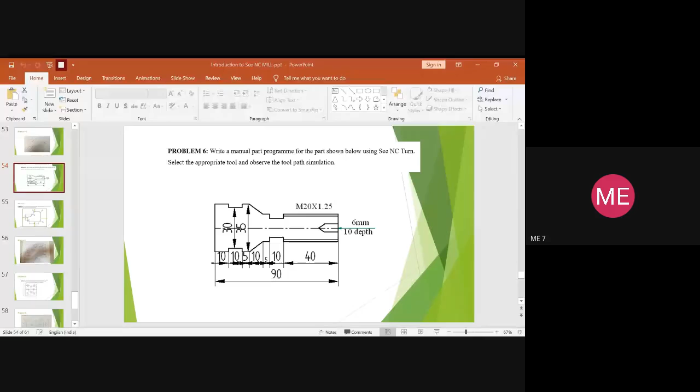Hello, yes ma'am. Okay, so this is program number six, what we will be doing on our CapsTurn. We have already written the program for this blank, right? Manual part programming, and we have dealt with the coordinate systems also, right?

The same coordinates for turning—it is always very easy, as we have only two axes: one is the Z axis, another is the X axis. If you go towards your left, it is negative; if you go towards your right, it is positive. Above this reference line it is positive X, and below it is negative X, so that you are aware and know how to take the coordinates.

So here, when you look at the given part, you have to do a regular turning operation, and also a thread cutting operation. Apart from that, we have grooving—both axial grooving as well as radial grooving. So all these operations now have to be done in our CapsTurn.

So for that, what is the first step? The step is as usual what we followed in the other CapsTurn operations—we will be providing the coordinates only for half of the part which has to be developed. Once the coordinates have been given, the line diagram will come for this part.

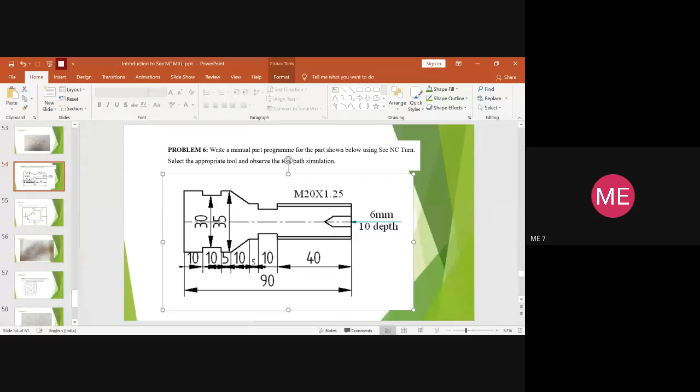So this is the same part we need to create now using CapsTurn. Let us kindly take down a snapshot of this diagram. It is needed for you to let me know the coordinates, and after that I will start up with the software part. Have you people taken down the drawing? Yeah, at least the snapshot of it. Yes, ma'am. Okay, if that is so, I will just end the presentation and go for the software directly.

Is my screen visible?

Yes, ma'am. Okay, so as usual you go for CapsTurn, double click, the window opens, right? For the startup, it asks you to create a new part. So when you open it, this is the work setup which you get. I have explained the work setup sheet in the previous program also.

You need to select the material which is free to perform the operation. So you go for the material steel, which is for free cutting. So you will select steel here, which is for free cutting. Select that, right? So holding is always external.

Don't make any changes. The jaw position you should give - I have explained why it is 110 in the previous session. So you'll be having the job, and you have to see the dimension of the job. In between, at least we need to give 5 or 10 mm clearance, and the jaw holds it, right?

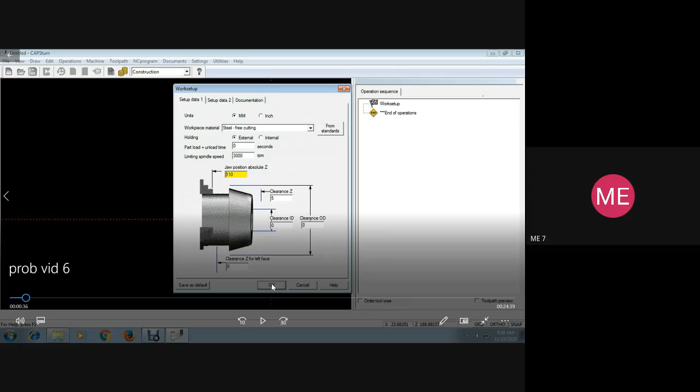Apart from that, you have to give the dimensions such that the jaw will hold. For the jaw to hold the blank at one end, at least 20 or 30 mm has to be given. So this entire length will hold good for 110. If you write positive 110, it will come the other way. So kindly type it as minus 110 so that it takes the dimension towards your left hand side. Kindly provide the jaw position accordingly.

Okay, so for the clearance value Z, it is always preferable to give 1 mm so that before starting, the tool will be somewhere nearer to the blank and will not be touching it. So give a positive value - it is not needed more than 1 mm. Just give the clearance value as 1 mm, and after that you can press OK.

The clearance outer diameter - you just check the diagram and give the outer diameter. After that, you will go for drawing the line using the line command, right? So as I explained in the problem, you will be just providing the coordinates for the upper part. The lower part will be displayed automatically when you go for the machining process, because only the coordinates for half is needed - the other half, since it is a turning operation, will be taken automatically.

But in case of writing the part program manually, we used to give the entire diameter of the blank. But while doing the reverse - drawing the part and generating the code - you will be just giving half the coordinates. So that is the case where you will start up with the coordinate system now. Usually you start up with x0 and z0.

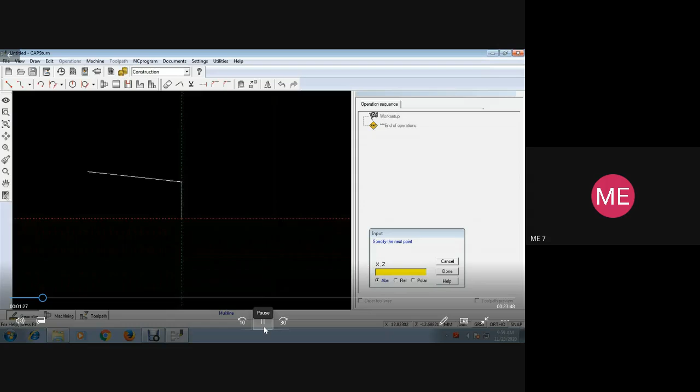Kindly check the diagram of the PPT. Yes ma'am, right, so I don't have the reference. I have closed my PPT over here, so kindly cross check.

So x will be 10 here and z will be 0, so the line has come over here, and then it has to move towards your left. So x remains same, z is going in negative direction for 40 mm, and hence now x is 10 and z is minus 40, so you have got this line over here.

So then I guess you have a groove cutting option at this point. So you have an axial groove cutting operation. Please look in the diagram. So for that you have to go for grooving. So if you see here the image what I'm showing, this is for grooving.

So you have to click this. It asks you which is the width you need and what is the depth of grooving which has to take place. So it is an axial groove cutting, so you have to provide the width accordingly. So what is the width you need for the groove?

If you look into the sketch, I guess 10, is it 10 ma'am? 10. So you will give the base width as 10 and the required depth as 3. So you can see the slot for the groove.

So now where you will fit, you have to again give the coordinate here, x 10 and z minus 40. So then it will come and sit over here directly. After that, you need to proceed further.

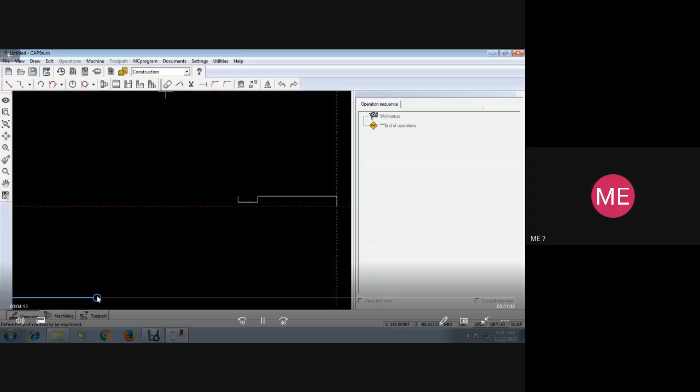So just provide the coordinate from here till here, and the linear interpolation coordinate. You have to check and let me know the coordinates, or else it will be difficult for me here. I haven't taken the image also.

So after this linear interpolation, again you have one more groove. What you have to do, let me take a snapshot of it.

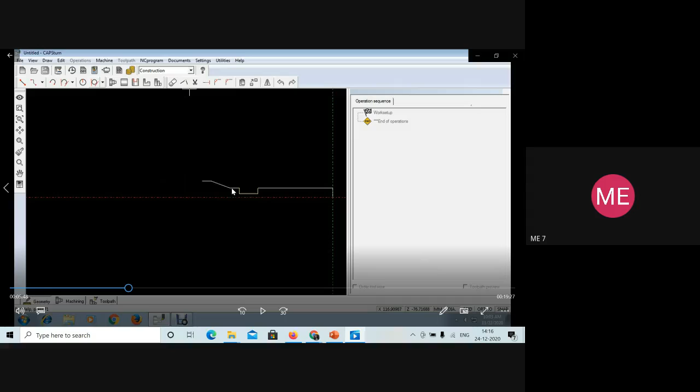So after this, you had a varied length for tapering. So here again, now the x has been increased. Overall diameter of the blank is 35, means it is 17.5. So here x will be 17.5 and z will be 55 plus 10, so it is minus 65.

So after this, you had again a linear interpolation for 5 mm. So here x will be again plus 17.5, and z will be 40, 55, 65. So z will remain 65 at this point.

So after this, we have the groove cutting operation again. So we need to start with the groove cutting operation, so you have to go for groove cutting. And now again, you have to provide the width.

Width is again 10 mm, right? So you will have to provide the coordinate. Again, x is equal to 17.5 and z is minus 65.

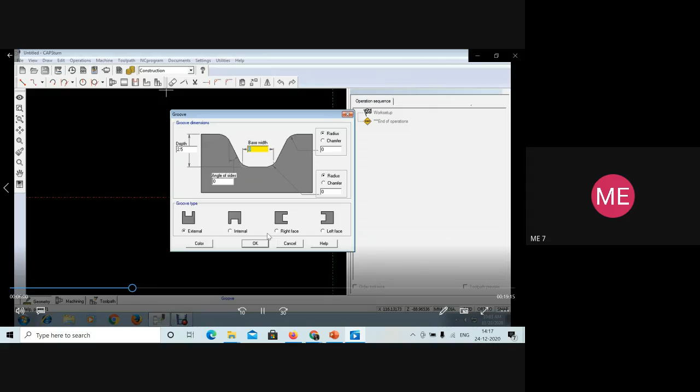65 plus 5, I guess, 65 plus 10. What was the coordinate? I didn't see. It's always better to write and keep the coordinate. It is minus 75. It is minus 70, okay, I missed 5 somewhere.

So after this, you have to again start the coordinate system, right? So go for the line command. From here you have to give, so x is 17.5 and z is minus 80.

Okay, so from there you have 10 mm, so again x will remain 17.5 and z was minus 80. You will add minus 10 again, it will be minus 90.

So now we are done with half the part. Once you have created the line, always remember you have to go for draw and define the contour, and define the part. The color gets changed. Without defining the contour and defining the part, you cannot perform any operation.

So after writing the coordinates, be familiar with the coordinate system. Write down the node numbers 1, 2, 3, 4, 5. So this is 1, 2, this is 3, 4, 5, 6, 7, and 8. Write down the coordinates for 8 on a paper and keep it ready. Then you will start up with the CapsTurn.

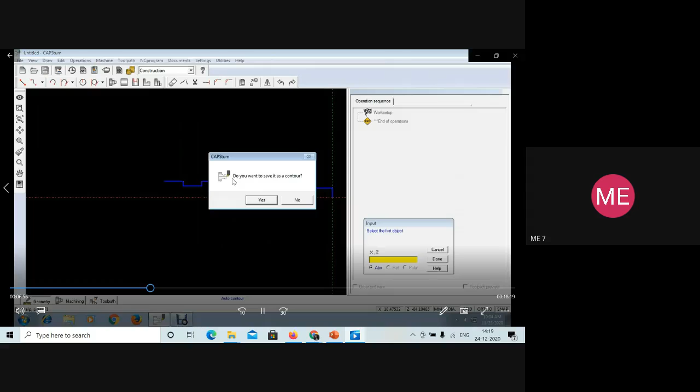So it asks you, do you want to save? You will just save yes. So the color got changed.

But you can observe the groove what we have done has not been selected. So now when you go for creating the part, it will select. But you observed it will select, but it has changed only the lines what you have created and not the grooving part. So that remains the same.

And then you have to now go and save. So it is shown twice, I don't know why - so it is defining the contour again. Then again the part has been created, defined. So when the part is defined, the color gets changed from red to pink.

So once this is done, what is the next step I have told you? You cannot start without giving the dimensions for the billet. So in the question, you have to provide the blank size also.

Usually in the question they give you the billet size, so as per that you will provide the length here. To provide the length you have to see what is the overall length needed. Overall length needed is 90 mm, right? Apart from that you should see the 5 mm allowance, in between the jaw and the workpiece where you want to do the operation. So 90 plus 5 becomes 95.

So after that you have to provide the dimension for the jaw to hold. So 95 plus 30 also you can keep, or 95 plus 20 also you can keep. Accordingly the length gets changed. So as per that you will give the blank size, and then the diameter.

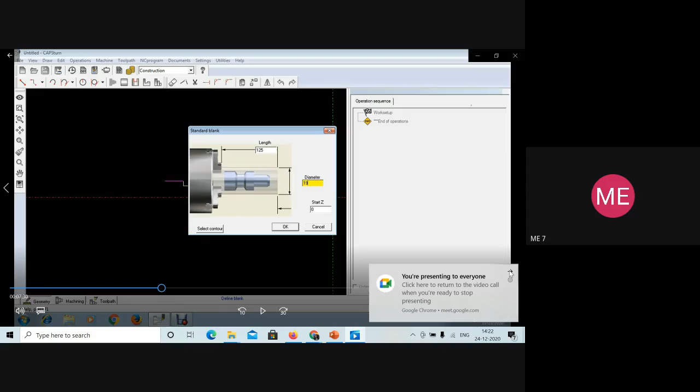You will directly go for the CAPSturn. You will create and generate the program, and you need to take the printout of other things at the end, which I'll go on to explain. Yes, ma'am, so there is nothing much more to write here.

So accordingly, the blank dimension what you give for that, you also have to give half the diameter only, but don't give the exact diameter. Exact diameter of the part we need is 17.5 because the diameter of the blank required is 35 mm. But we will give 1 or 2 mm allowance extra for the blank size, and hence here the diameter we are giving as 19.

And always you need to give the value of z as 1 so that the blank size will be outside the part we need to do. If you give 0 it comes exactly on the part. So you need to give an allowance of 1 mm minimum, so we are giving z value to be 1 mm. Once that is done you can see that half the part of the blank is being generated.

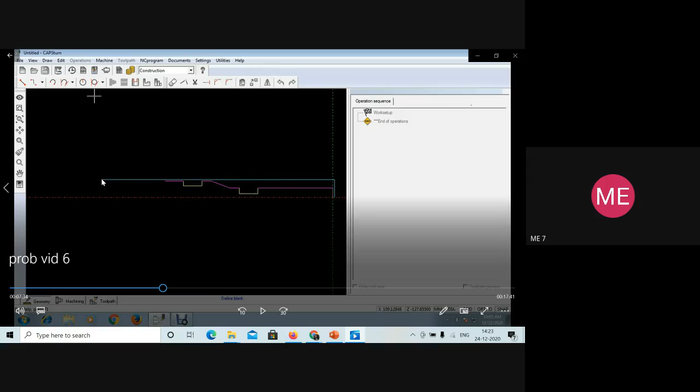So when we go for machining, the remaining part will be visible for us. So then you go for machining. So now you can observe the minimum part of the blank is also being seen.

So then you have to go for the facing operation. You need to remove the facing part, and then you need to do the turning operation. For all those we need to select the tool, so we have to go and select the tool one by one.

After this you will go for plain facing operation. Select the tool for that one. You need the facing operation for rough finishing. In that only you will do facing and turning. Another one is the finishing tool, right? So this is for the rough turning operation.

The general nomenclature, let it be the same. Don't make any changes, just press OK to it. Only thing, you just check the required nose radius is available.

So you have to show from where to where you need to do the facing operation. After clicking the facing operation, you have to use the cursor and select from where to where you need. I've made a pause, so now you can select from which end to which end you need to do the facing operation. Once that is done, if you zoom out, it will show you from where to where the facing is to be done.

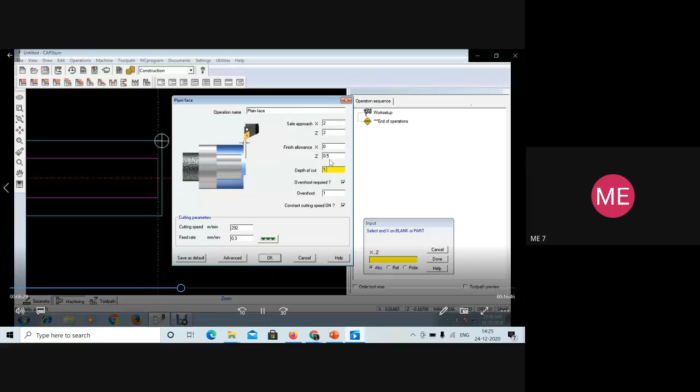So then it shows how the facing has been done here. If you give an overshoot value of 0, the excess material will be retained, as explained in the previous sessions. So see that the overshoot value will be kept as 1. The depth of cut you give as per the requirement. So that is done for facing.

The same tool will be used for the turning operation also. So one tool has been selected. Then you need one finishing tool also. For the finishing tool, again you select from where to where you need to do the finishing operation. So again from here till here you will select. It will help in doing the finishing operation for the face turning.

So now you have two tools: one is for the rough turning, another one is for the smooth finishing. It is shown again for your understanding, the same thing. So you have the two tools here which have been listed out.

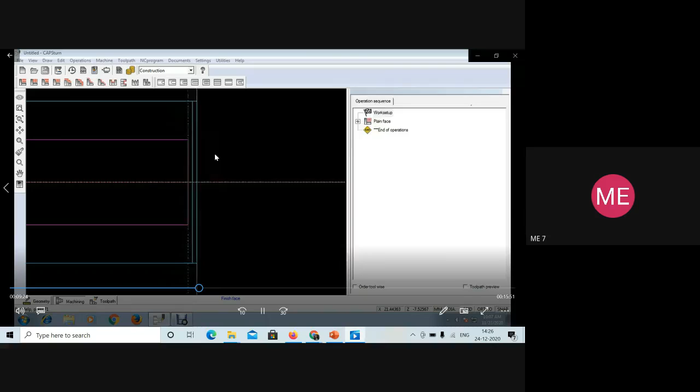It has been repeated again and again. Let me... so you can zoom in and zoom out the part exactly, so it will be easier for you to understand.

Another thing, you have to select the turning operation from when to when you need. So this end to this end, the entire part has to be done for rough turning. So when you're doing rough turning, finishing also has to be done. It is always better to give the required finishing allowance. No need to give a huge gap in between; 0.1 or 0.2 mm of finishing allowance will be enough.

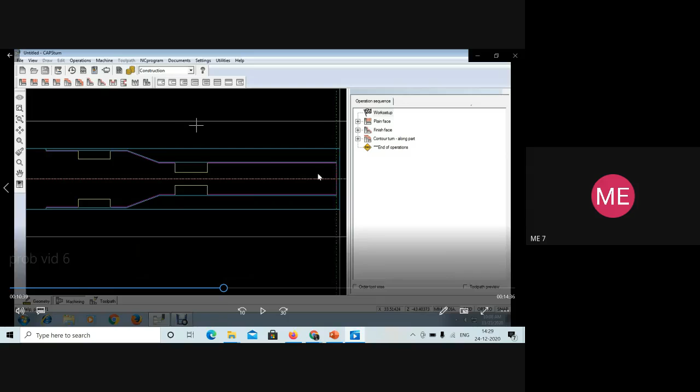Now you can notice you have two different lines: this pink one is the rough turning one, and this blue color one which is visible is the finishing. In between you have 0.2 mm of allowance. So the rough turning tool will do the rough turning and rough facing, and then the finishing tool will do the finishing operation for the turning as well as the facing operation. So we have set the two tools already.

Now next you have to go for grooving. Since we have radial grooving and axial grooving also, you need to select the tool. So you went for grooving operation and you have to select the tool for it. Go for radial grooving here.

So select the unit as mm. Here you have to go for grooving, right? So here it is 12 into 12. This is the holder width of 12 mm what you have, and the corner radius is of 0.2, and the tip width is of 2 mm.

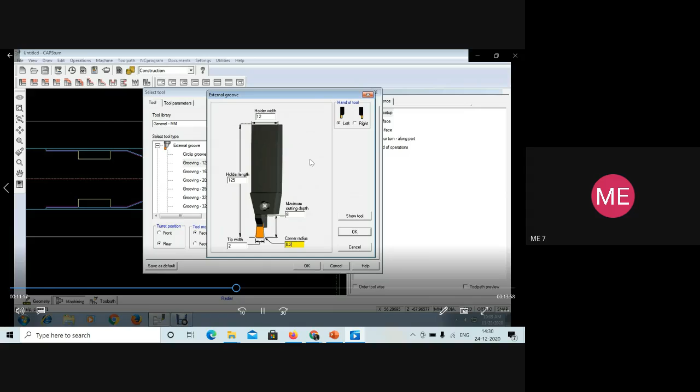So whether you select hand of tool either left or right, the program automatically takes it, okay. So even though we select or not, there's no need of selecting either left or right oriented. Just see the required dimension and show from where to where you need the grooving operation. You need to select from here till here, so that it will do the required grooving operation.

So here you need to tell whether you need an external grooving, right? So it is by default. Then you have to provide again the allowance. What is the finishing allowance you need? What is the peck depth which is being needed? So kindly give the peck depth value, okay.

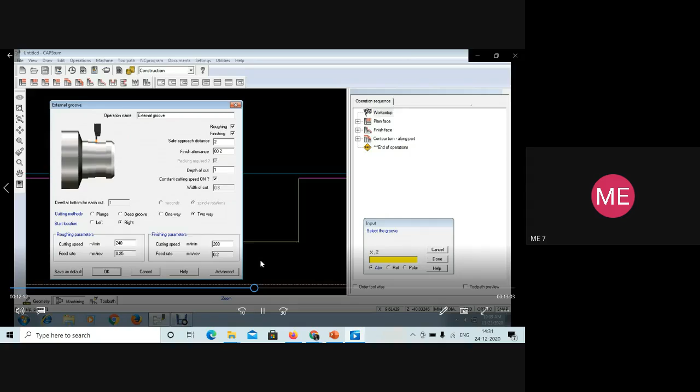So it will perform the operation accordingly. Once the peck depth value is given, it will take the finishing allowance and complete the other part of the finishing aspect as well. So for that you need to select from where to where. You have selected, and the same thing is shown here again. So by varying the finishing allowance, you can see what difference you will be getting. Previously it was 0.02, now they took 0.2 and showed you the difference.

So now the selection for the radial grooving is also being done. Then we need threading operation also to be done, right? As per the given diagram, you have a threading operation and external threading operation. They have given the dimensions of the pitch also. So we have to do, right?

And you have an axial drilling also. For that you need a drilling tool. So we have to go for the libraries, make the unit in mm, select the central drill and the diameter you need. Based on that, you need to select the drill bit. So here the operation name automatically comes as drill.

You have to check what is the hole depth needed. In the question it is like 10 mm. So as per that you give the value as 10 mm. So that is done, okay, so you have set.

Then you have to go for threading. You have a threading operation, external thread cutting. So kindly click external thread cutting, right? So there, if you go back, you can observe external thread cutting.

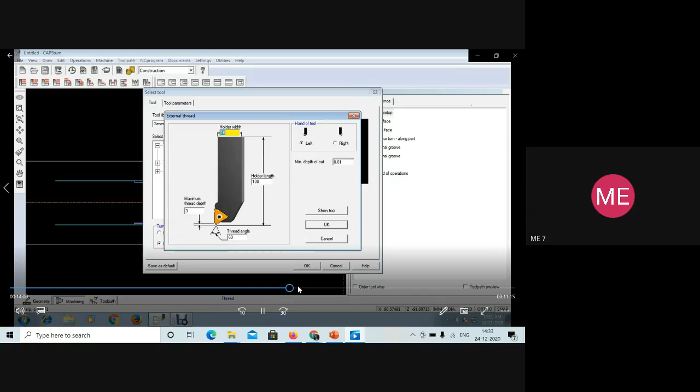It is like holder width is 16, right? Holder width will be 16 here, and maximum thread depth we can get will be 3 as per the specification. So then you have to check the dimension from where to where you need. We need from here till here, right? So you have to zoom and be specific to click from where to where you need. Okay, so this is the line in which we need to perform the thread cutting operation, so that it performs a required external thread cutting as shown here in the simulation.

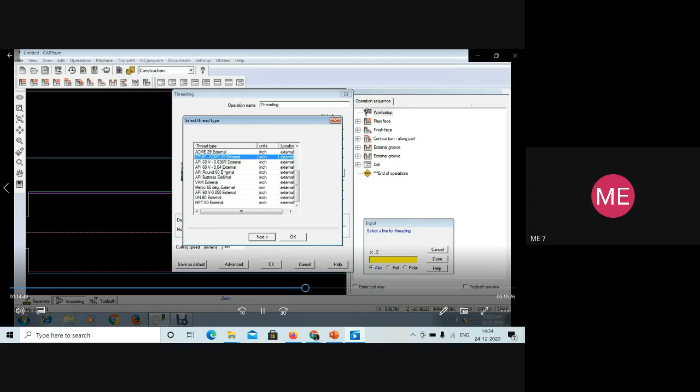So if you specify you need a left hand thread, it moves from left to right. If you need from right to left, it moves from right to left. So it depends upon the requirement, which type of thread you need basically.

So here the pitch value you need to give. In the question you need to check what is the pitch value given. So if you go back to the sketch here, you can see it is of 1.25 is the pitch value given, right? And 10 mm is the depth that we have given already, and number of cutting passes is 6. So as per that you will feed the data of thread pitch value as 1.25.

So number of idle passes we usually give as 2. So that is maintained. So now the specification detail for thread cutting is also done.

So once the machining specification is done, then we will go for tool path. Very first step is always geometry. If you see in the bottom down towards your left corner, you have 3 tabs: one is geometry, machining, and tool path. In the geometry, we usually provide the coordinate system, create the line, define the contour, define the part, and define the geometry of the billet.

Once that is done, you click for machining. The opposite line diagram will come automatically. After that, you define the tools needed as per the tool operation, and you select the part also, from where to where you need that specific operation. Once everything related to the machining specifications is done, the next step is to go for the tool path, which will simulate the operations selected with respect to the dimensions chosen, from where to where we need different kinds of operations.

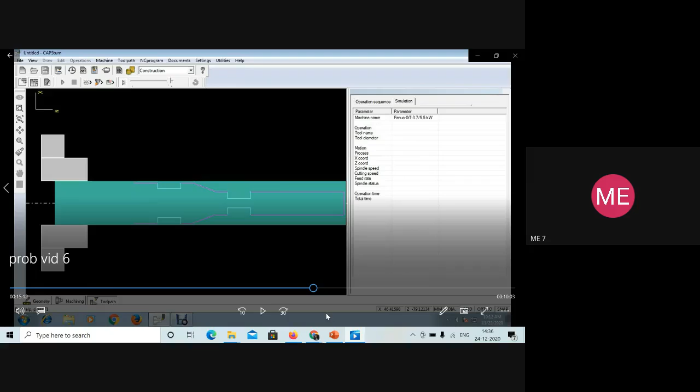Once you are clear with the machining part, you click the tool path. In turning, always remember you will only be having two coordinates, Z and X. So you click the tool path, and they are showing the beginning dimension of the blank here again. This is already done. You click the tool path over here.

When you click the tool path, it will show you the jaw also. So always before starting, it is better to save. We haven't saved until now. You can just type the program number, whichever. This is our program number 6, so you save it as program number 6.

Once you click the tool path, you can see the rough turning tool has come and is performing the facing operation. It does rough facing and rough turning operation. Then the smooth finishing tool will come and do the smooth facing and smooth turning operation. That is the thing you observe here, so I can zoom out and observe how it is performing.

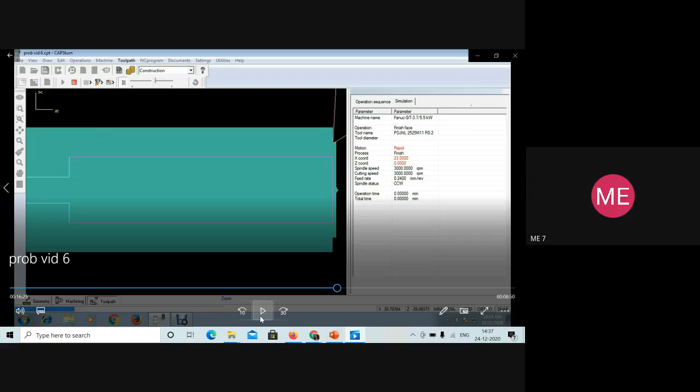Now the turning operation will come. It will move in the shape of the part. Even though you don't have the blank over here, it will move like this until the material has been removed. It will still come down, and now the material gets extracted, moving with the shape of the part as it has to. Again it comes down and removes the material for rough turning. So rough turning is done.

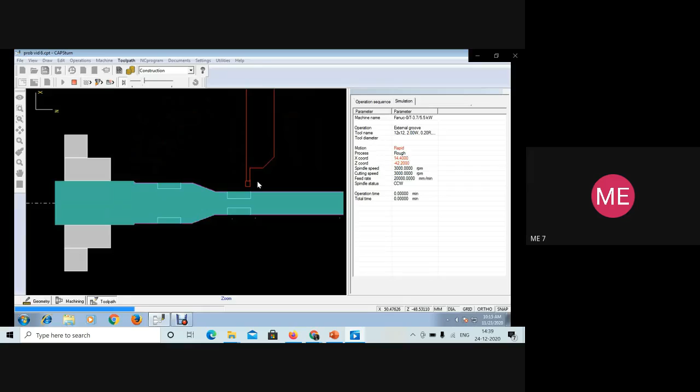And now the grooving, the axial and radial grooving, as per the given depth and peck depth, will remove the material. And then we have one more radial groove here. After this, the axial grooving will be done, and then the thread cutting operation.

Then you had a twist drill bit which was being used to do the required axial drilling. After this, the thread cutting tool will come and do the external thread cutting operation. Now it has been completed, and you can see all the types of tools which have been used.

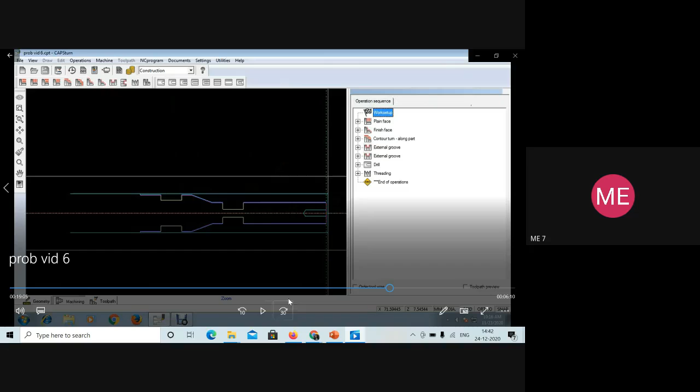The three tools being used are shown over here, and they are also showing some changes if needed by mistake. If any mistake is there, you can delete that particular tool and redo it, just to show the possibilities if you come across any errors. The same thing has been repeated, so I don't want to go over it again.

After that, the very first thing is you have to save. Okay, it shows you the cycle time. Once it is done, I'll pause here. So you can see this icon. If you click, it provides you the cycle time, which is the time required and all details related to the operations. So if you go and click there, you will get that cycle time sheet.

So it shows you what is the time taken to perform different operations. You can go and save it within the folder where you have created. This is one printout which has been needed. So this is the cycle time sheet.

After that, if you go, it provides the list of tools used, and then you can provide the specifics. Before that, let me show you this icon. Yeah, you can see your G01.

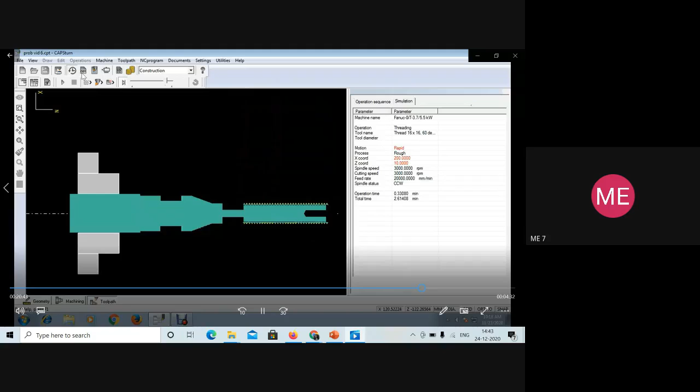So the tool list also, it will show which are the tools which are being used. That also, if you need, you can take the printout.

Ma'am, record only diagram or what all, ma'am? See, in the record you have to write the part sketch. On the right hand side in the rule sheet you have to just write the key steps you follow. That was only related to the previous scheme. So now in your 2018 scheme you are supposed to take the printout of the program which will be generated, what I showed you before.

Ma'am, hello, ours is 17 scheme. 2017, ma'am, yours is 2017. I'm sorry, previously it was 2015 scheme what we were following, and in 2017 scheme these printouts are essential, and hence all these things are being shown to you.

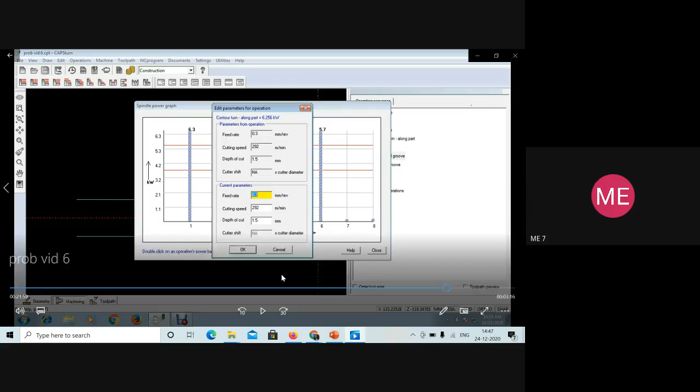So this is the spindle power graph. If you click on this, you will get the spindle power graph. So that also needs to be saved.

If you double click on this, the values of the spindle speed, everything will be displayed. So these things, what is the feed rate, everything.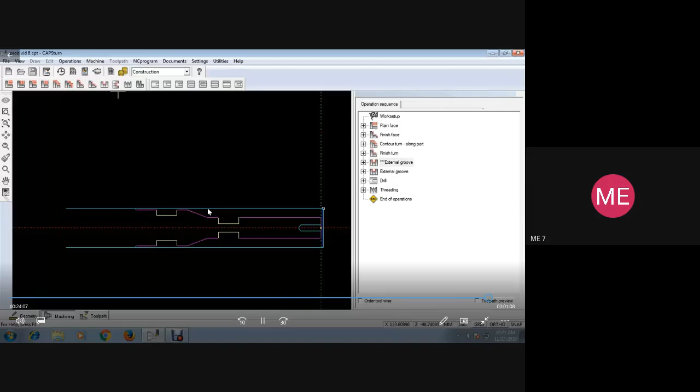For different materials, the time required and the cost will be different, so you can optimize time and cost by selecting the best material. If any industry person is watching, this will be very helpful. Before going into the actual production process, they can do trial and error and check which material is more feasible, not too costly, and won't consume too much time. In that way, this CAPSturn will be helpful. I think this is the end of program 6.

So I will stop here related to this program. I hope at least the minimum basic concept of how to perform has come to your mind. Is it so?

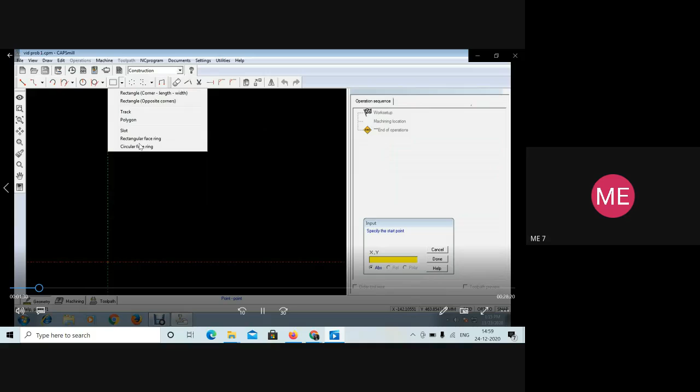It shows you the coordinates, X and Y axis. X, Y and Z also come into picture in case of CAPSmill, not only Z and X. You can draw a perpendicular point with respect to some perpendicular plane, all those things. For the arc, you have start and center point, and the circle also you can draw with different specifications to draw a rectangle, a polygon, whatsoever.

Now the difference is the points on a circle. Suppose you need to do a drilling operation in a given blank in a circular path. If you give the diameter of the hole, it will allocate the cursor with a plus point at different locations where you want to drill the hole. It is not necessary that you have to go and select the coordinate for each and every hole. It is much more easier.

You can specify what is the diameter, and within that given diameter circumference of the circle, what is the number of holes you need. If you give that, you can see the blank with the holes—though you will not see the holes directly, you will get a cursor like a plus point, wherein you can use the drilling operation later as per the requirements.

First you will locate the center, then you will drill, and you can use counter boring to extend the hole as per the requirement. So it will be much more easier if you go with this kind of pattern.

If you provide a dimension for the diameter and specify the number of holes you need, what is the angle for the first hole can also be defined. Now you can see the plus points wherein you can create the formation of holes.

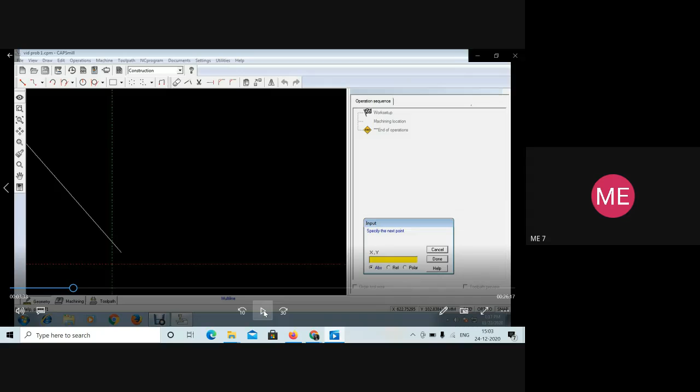So as per that, now we have to give the coordinates. The first coordinate given is x25, y35. Go back to your diagram, the sketch I showed you before. Please have a look, I have given the program. You have a part which has to be created, kept within the blank, and on every side the part is away 25 mm. With respect to that, I've shown you the reference plane considered as x, y, z 0, 0, 0. So the first coordinate system we are supposed to start with is x25 and y35.

Okay, they are not starting from x25 y35, they are starting from x25 y55. From any point you can start, it depends upon your convenience.

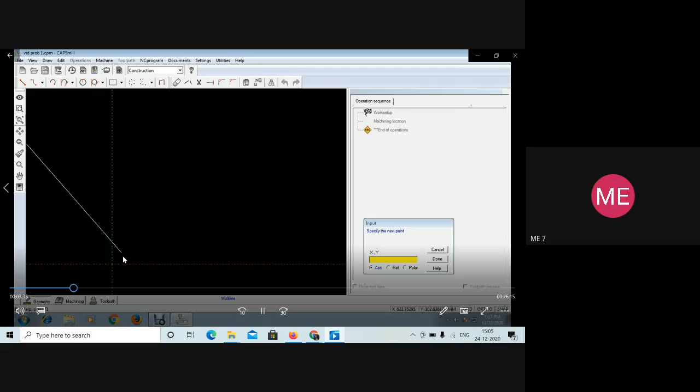First is x25. Just delayed much, it has to be shown quickly. X25 and y35, okay, they have started from there. So the next coordinate is x25 and y55. Please refer to the diagram which has been shown to you. So next point is x25 and y55. You can zoom in to identify the line properly.

So after that, again you have a linear interpolation only. The third coordinate, if you remember, please see the diagram. Can anyone tell me what is the third coordinate? It is x35 and y65. Yeah, it is x35 and y65. Let them write the coordinate. So next is x35 and y65.

After that, you have 10 mm which is moving above. So it will become x35 and y75.

After that you have a circular interpolation, right? It is moving in anti-clockwise direction. For that, you have to give the start point and the end point, and then give the radius - arc from the start point and end point. So it will show you like this. Once it's showing like this, you've given the coordinates. The start point will be x35 and y75. The end point will be x45 and y85, but it's not the required arc what we need. Here it is showing that, to be specific, you have to give the radius more than 7.07. In the question, the radius has to be 10, so you specify the value of radius as 10. Then you get the required arc.

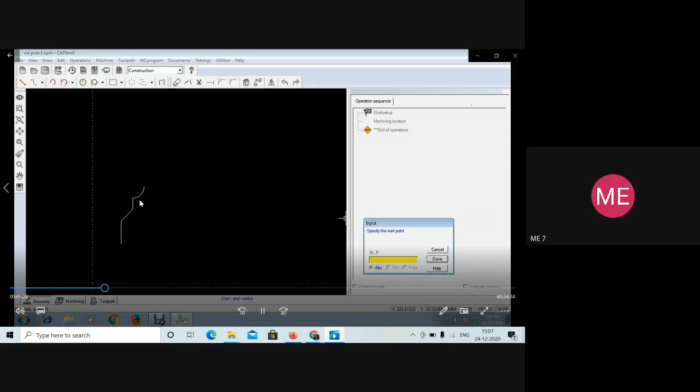So after this, you will get the value of the arc as shown. After this, again we have one more circular interpolation, it has to come like this. For that, the start point here will be x45 and y85. The end point for the arc will be x55 and y95. Kindly provide the coordinates accordingly.

It has to - yeah, now it has been given. Okay, so after that, the end point is given, and then later the radius value also has to be given. It will ask you the radius value, you have to give it as 10. So now you got both the arcs which have been created.

So then you have a linear interpolation again - go for multiple lines, provide the coordinate system. It is x55, y95. You will get the line command here again. From there, now you start. So the next point will be x85 and y95. Kindly type it, you have to refer to the diagram and keep the coordinates ready.

So you got it. From this again, we have a circular interpolation, right? So for that again, you go for arc from start point and end point. The start point will be x85 and y95, and the end point will be x95 and y85. Then it will show you some odd arc, so then you have to figure out the value of 10 as radius, and then you will get the required arc.

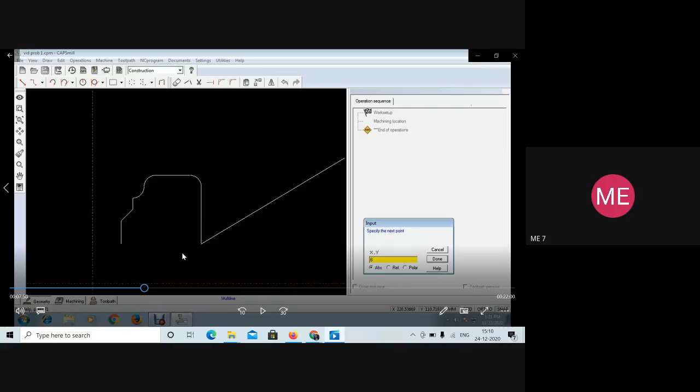So it will come here. Then again you have a circular interpolation. For that you have to give the starting point of the curve, which will be x95 and y35. Then it will come down. The end point here will be x85 and y25. After that, provide a radius of 10.

Go for arc, specify the start point x95 and y35. They took the end point first, x85 and y25, then the start point. So it is showing, if you go a little bit back, provide both the coordinates, 85 and 25 first, and then it is x95 and y35. Then it asks you for the radius.

It is looking like an odd curve. So that looks odd until and unless you give the actual radius. Here again it shows you have to give more than 7.07. In the question it is shown that R is to be 10, so kindly give it as 10. Then you will get the required arc.

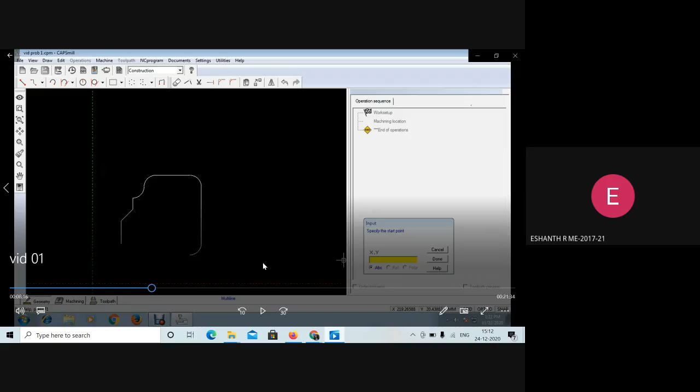Yes ma'am, what if we give starting point as x95 and y35? See, sometimes it takes x95 and y35, then we go to x85. Here what's happening is x95 is more and you're going down with a lesser coordinate. In that case it won't take sometimes. So always we go from lesser number to higher number. Previously we didn't have that problem because we used to go from x45 to x55, which was a higher up value. Now we are going from higher value to down value, so in that case it won't take sometimes, and hence it was taken from x85 to x95.

Okay yes ma'am. So from here again now we have to draw a straight line. The coordinate will be x85 and y25. Then again write the other coordinate system here. The last one, what is the coordinate here? X25 and y. Okay, now we need an arc.

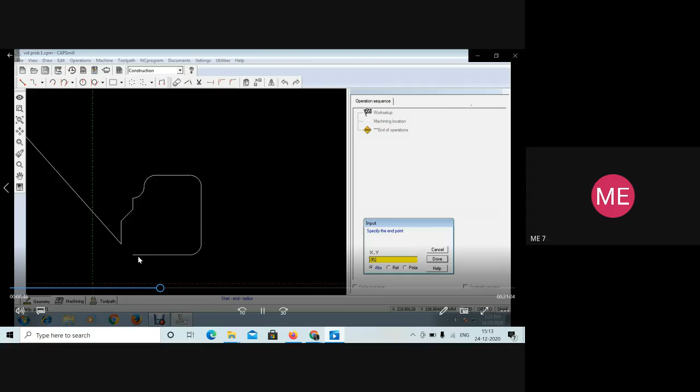So now it has been taken from here to here because this is still a lower value, and this is at least at the upper end. So it has taken from x25 down here, and again you will give the radius of 10. So now we have got the required line diagram.

We can't call this a contour, it is just a line diagram what we have done. After that you have to define the contour, then define the part, then draw the blank or the billet, and do the facing operation.

So now we have to go for draw and select the part. This is too much delayed in the recording.

Okay, so for define contour, you can go here and select. It selects one line, so you go for auto contour. When you click one line, it will select all together. Once you save the contour, the color gets changed from white to red.

After that, you can go and define the part. Draw and define. Yeah, this is done. Then you go here, no need of the part, only the contour, and go directly for the blank. The blank you have to define based on the given dimensions.

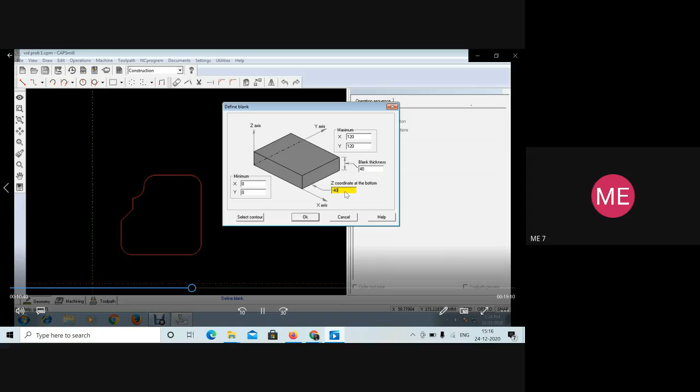And later the Z coordinate, which will provide you the depth. So always give a depth of around 30 or 40 mm. Suppose the depth of the blank is specified in the question, kindly take the depth or the value of Z as given in the question.

So now you have defined the contour for the blank as well as the part which has to be end milled. So now after this, if you zoom, you will get a clear picture of it, right? So everything is done.

If you go here, if you want to delete, even that could be deleted. So I don't know, they have just shown you how to delete the blank, and again the blank has been created back here.

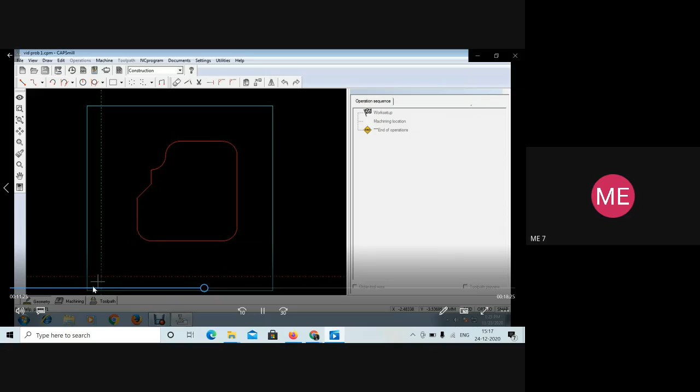So to show what happens if you take minus X and minus Y, here you can see the difference from the reference plane, which is X0, Y0, Z0. If you take minus 10, then it will be below the reference.

So then all the coordinates get changed as per the drawing we have drawn. It's better to create with respect to the reference point 0,0,0. Hence now they are again drawing the blank with the minimum value of x0, y0, and this blank size remains the same, so that you get the blank with reference to our reference 0,0,0.

So after this, we are supposed to do the facing operation, face mill and end mill. For that we have to go for machining, click machining, and you will select.

So this is the facing operation. Click on that, and this facing operation tool will come. Keep it on mm, let the unit of the tool be mm. We need to do the face mill, so kindly select the face mill. You don't want a face mill at an inclined degree, we need a regular face mill, right? So you will select a regular face mill here, and it asks you what diameter is needed, so you can select the diameter of the face mill.

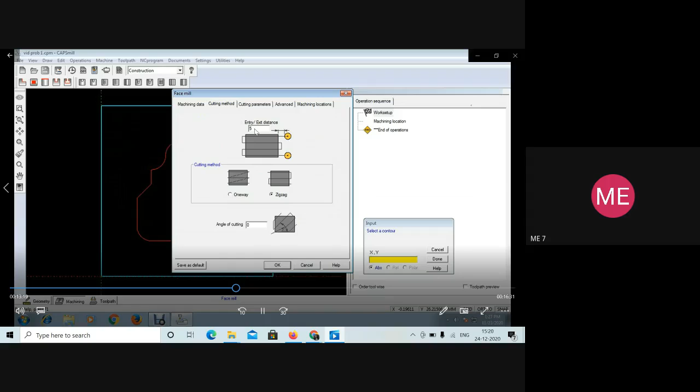So after all those, to exit you have to give the value you need. If you give like 5, it moves the tool above by a distance of 5 mm. So depth of cut, whatever is needed, you can give as 5, and then you just click on add, so it gets added up.

So this is done. I don't know why it has been shown.

So now one tool has been selected for the facing. Then you have to select one more for end mill, because we need to create that part we have done, right? This part has to be performed by a milling operation. So we selected one more tool for end mill, of diameter 5 mm.

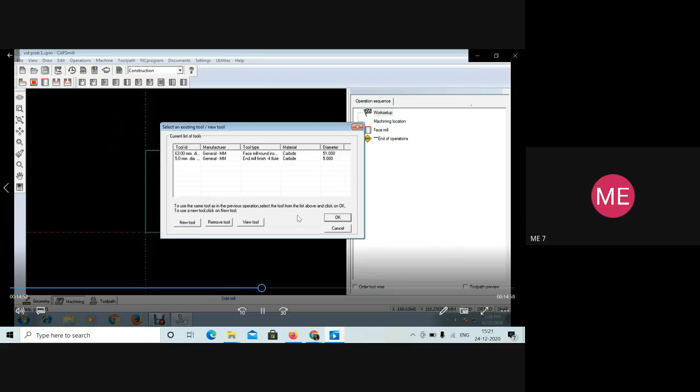So now again you have to... okay, they are showing an end mill tool of lower diameter now. Previously they had taken 10 mm, so now they are showing it for 5 mm. It also depends on whether you want to change the number of teeth, either to 4 or 5, that you can vary. Usually it is better to go with the regular data, so that will be good enough.

If you click hand of tool left, it will rotate from left to right or from right to left. So that will be taken care of.

So then you have to select the path in which the end milling has to be done. It has to mill the entire contour, so you will say yes, you have defined the contour already. This entire contour has to be milled out, and you will say it as S. So now this part will mill the whole contour. Here the circle part has come because we had a circular interpolation here.

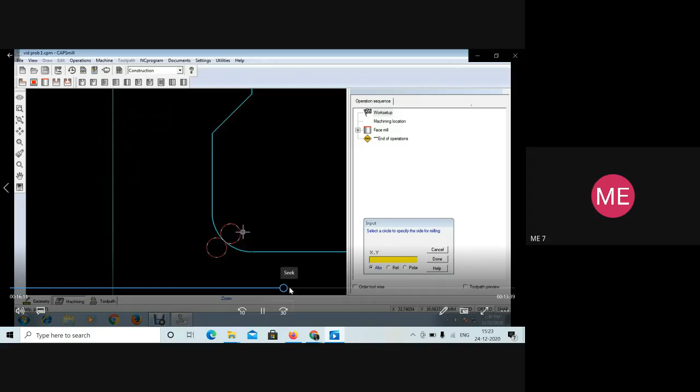So for that you need to specify some details.

So if you can zoom out, you can observe. For that you have to provide the type of milling you need across the side. This is all very much essential when you don't have a circular path, but a rectangular or square path, where it specifies all these details. Now when you have a circular interpolation...

They haven't changed anything, it's the same - depth of removal is -10, the material width. There was no major change, only it was showing red in color. I thought the allowance given for circular interpolation would be different, but no more changes were done, only those two red circles were visible. So that has been removed, marking the end of machining, and they have directly come for the tool path.

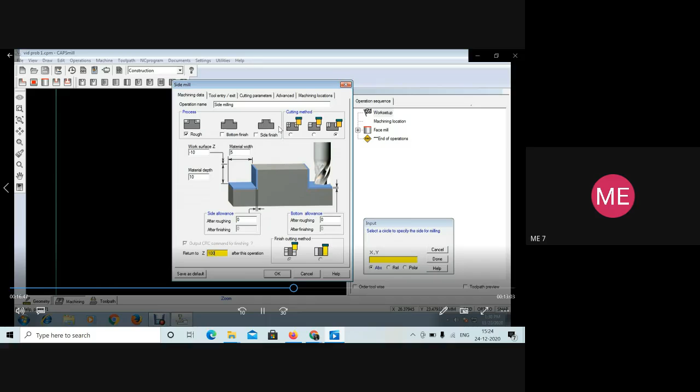Since here it is only specific for rectangular or square, because at the end you had a circular interpolation, I guess that symbol of the circle was being visible and nothing much more, because no more changes were specified here. And now it has come for the tool path.

So this is the blank, and since we first defined the facing operation, the facing operation will be done in this way for a depth of 10 mm. The -10 means you are removing material for 10 mm. This is a face tool of diameter 63 mm, and as it is a huge tool, now the facing operation is done.

So after the facing operation is done, then the end milling has to be performed.

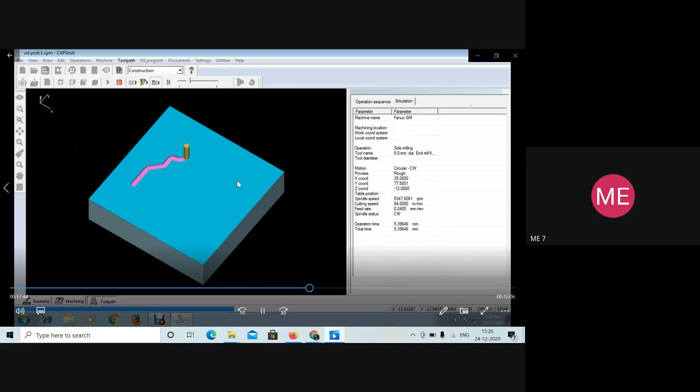So now this is an end mill tool which has come and is performing the milling operation as per the coordinates we defined and the line we drew. We defined the contour, selected the end mill, and showed that the entire contour has to be milled out. As the entire contour is milled as per the required depth of cut, this will end up with the end milling operation.

And it will move until the required depth of material is removed. If it is 10 mm, it will remove it with 2 rounds of 5 mm in depth in a single stretch. It depends upon the retract amount you are giving. Based on that, you will have n number of turns until the required depth of material is removed by pocketing.

It was for 40 mm, I guess, the depth given in the question. So in that case, this is the operation which is performed, and then you can save the program number.

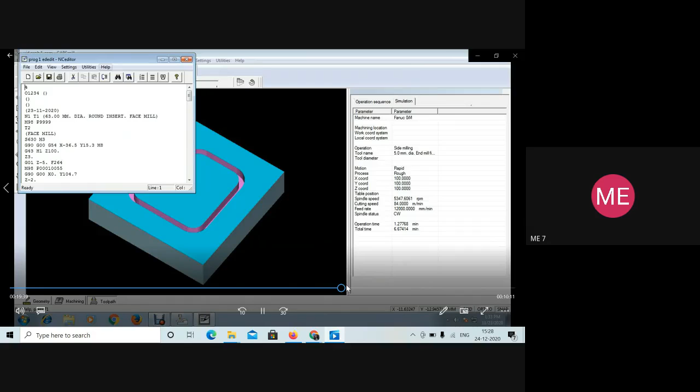And then if you click on this, it will provide the tool list, showing which tools we have used. Even that could be saved.

And then if you click on this one, it provides you the spindle power graph. And if you double click on the graph, it provides you the feed rate, the depth of cut, all those aspects. Even that could be saved.

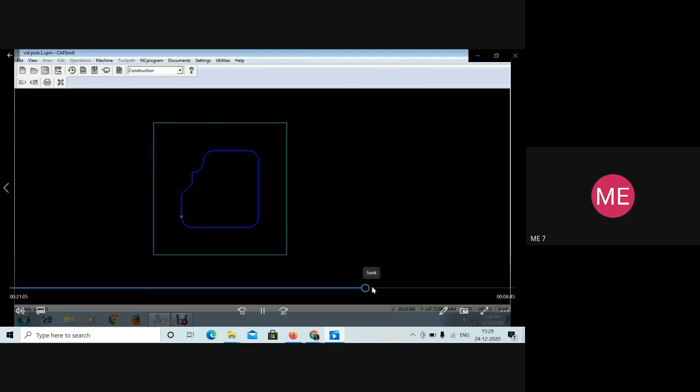And then for the line diagram, if you come here, it will show you the entire construction - how the tool has moved, what all operations are being performed. And here you can trace out the movement of the tool, identifying its movement for face milling in this way.

So this is just to simulate the trace of the tool. It shows how the tool has moved to do the facing operation. This is the face mill of diameter 63 mm. The yellow color traced out the path of how it moved to remove a depth of 5 mm, I think we have given 10 mm, so 10 mm of material is removed in the facing.

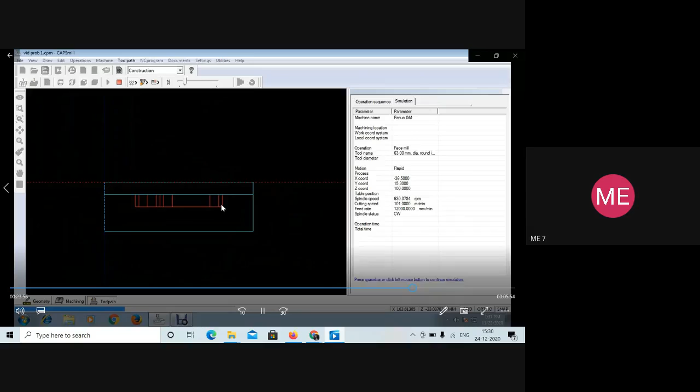Then we had an end mill, which has moved to perform the required end milling operation for a depth that depends upon the question in which the depth has been given. So first is the face milling, 10 mm has been removed, and then the end mill has moved still more in depth down. This is the different view through which the movement of the tool could be traced out.

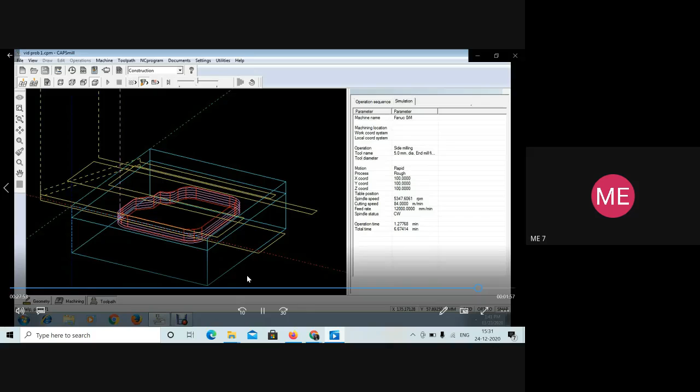And this is the end milling. How it is moving could be identified until it gets the required pocketing. So this is about the first program, and it has traveled with different rounds until it achieves every depth. If it is around 5 mm, 5, 10, 15, 20, I think it is 20 mm pocketing done by using the end mill tool. So basically the line diagram helps you explain how the tool has revolved and traced out for each and every operation. So this was about program number 1 in CAPSmill.

Hope the things were at least clear enough related to the CAPSmill problem.

Hello. Yes, ma'am. Okay, I will do one more program and end up by 4, so I think 2 more could be done on either Saturday or Sunday, as per your convenience in the afternoon session. I won't disturb you in the morning, you just have your Sunday and Saturday freely. Any evening after 2 o'clock we can just plan and complete. It's a matter of 1 to 1.5 hours, more than sufficient to complete 2 more programs. So let me share one more.

I'll close this. I'm going for program number 5. Okay, before this, I need to show you program number 5, right? Just a second. Where is the PPT? Hope the screen is visible. Yes, ma'am. Okay.

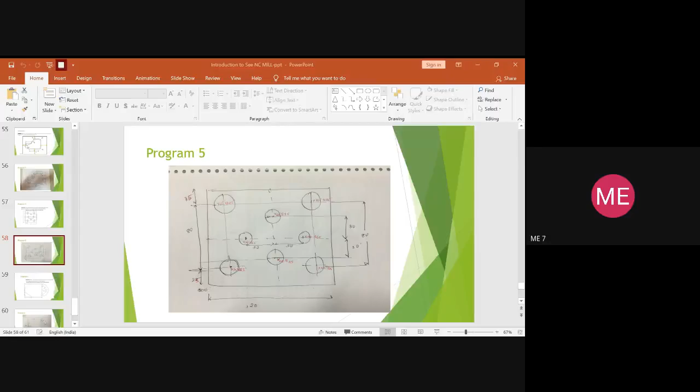Yes, ma'am, okay, so I will just stop sharing this and share the video. So now I will play the video and then share the screen. Is the screen visible to you all? Yes, ma'am, okay, so this is program number 5.

So as you open it, it asks you to either open an existing part that you have developed already, or to create a new part. So we go for creating a new part.

So again, you have to go and select the material what we need. So it is steel free. What we select, we will select steel, which is easy for cutting operation. So kindly select steel free cutting, and then save it immediately with the name you want. So it is like CAPSmill program number 5, right?

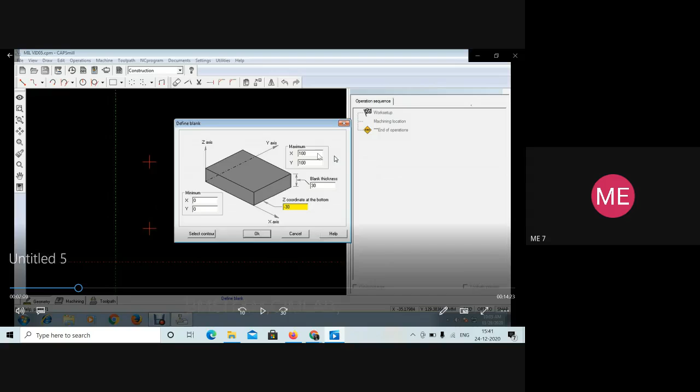After that, you need to define the blank. To define the blank, you have to see what is given in the question. In the question, the blank size is given as 120 by 120 and the depth is 50 mm. But here in the program, it has been taken as 100 by 100. In the program, what we have is blank size 120 by 120, but here to show, they have taken 100 by 100. It's okay, the same thing you can change to 120 and 120 as per the program. This is just to make you understand.

So now when you have created a blank of 100 by 100 mm, you can see the blank and the positions in which the holes have to be drilled out. The coordinate of the holes are proper as per the requirement. If you set the coordinate for the first one as x25 and y25, the remaining holes will be placed accordingly.

The second hole will be x25 and y105. The third hole will be x105 and y105, and the fourth hole will be x105 and y25, as per the coordinates we had given in CNC mill. Similarly, it will be located. Only thing, it will make our work easy. You can locate all the 4 holes together automatically by just providing the spacing between the holes and the coordinate only for the first hole. That will help you fit the holes where you need to drill.

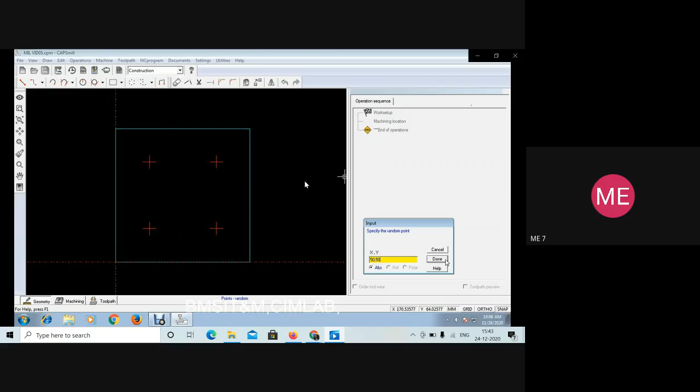Later, the second step is we will define the blank. Once the blank is done, you will zoom so that it will be clearly visible. After this, you need some more holes to be done. If you see, you can identify 4 more holes to be done. So before that, the center hole is being identified. I don't know why the center hole was needed.

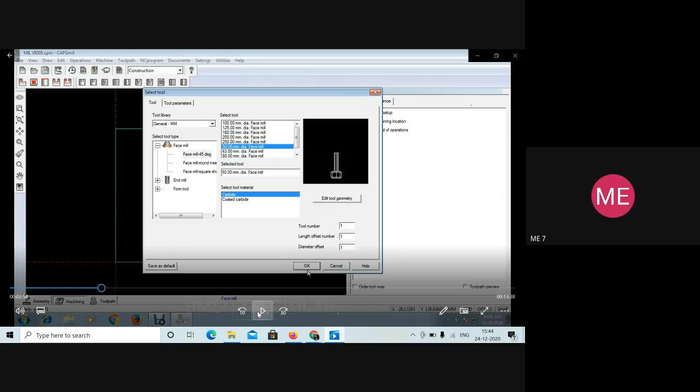The program 5 in our problem had 4 holes here and alternatively 4 holes here, but here it has been considered as 4 holes at 4 corners and 1 at the center point. You can consider this as only the question, not a problem. Anyhow, we will meet in the lab, and I will clarify this with a new program question. So with that aspect, let me move back. So they have identified 1 more hole at the center. Now total we have 5 holes which have been created, which have to be drilled out.

For that you need the tools. So first one is the face milling tool, as we explained in the previous program. The face milling tool, we usually go with the 63 mm diameter. So now we will select the face milling tool of 63. In this case, it is of 50 what they have selected. I don't know why.

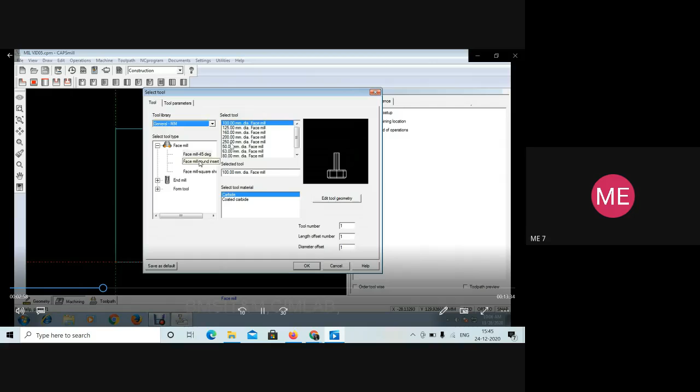Okay, so they have taken 50. Why? Because the blank size now is smaller. In our question, it was like 120 by 120, but here it is taken as 100 by 100. In that case, the diameter of the hole that face mill, what they have taken as 50, will hold good. So they have taken 50 mm.

That's fine. So after that, you have to just select from where to where you need to do the facing, from here to here. So you have given the material thickness what you want to remove as 5 mm, and return Z. So after that the tool has to move above, so give a positive value of 15, and this tool has to do the rough facing and the smooth facing.

So you gave the option for both rough and smooth facing. So you click for both roughing and finishing operation. Then press OK. Click both roughing and finishing.

Then you go for cutting method. How you are cutting, whether you want to go in this shape or in zigzag shape, and how many passes you need to complete that entire removal of the depth, because the facing operation here we are doing to remove 5 mm, right? So how many entries you need, whether you remove one material each in each path, and which is the path you want to trace, either one way or zigzag way. And if you need any inclined version of tracing of the face milling, that can also be assigned.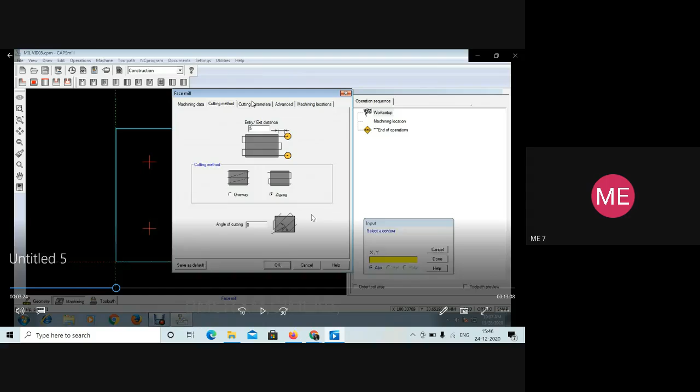So you will select accordingly which one you need, and also provide the depth of cut and cutting speed. For smooth finish how much you have to give, and for rough finish how much you have to give, and just add. So when you add, it shows the symbol like this. It is nothing but it will be performing the facing operation in this way, zigzag way. So this is a symbol which usually comes in.

What you have to understand, be quick, just a second.

So after this, the facing operation has been done, then we need to do the drilling of the holes, right? To drill holes you have to select the tool. Once it is done, so this is face milling only, I just reversed it back. So after this we will go for drilling.

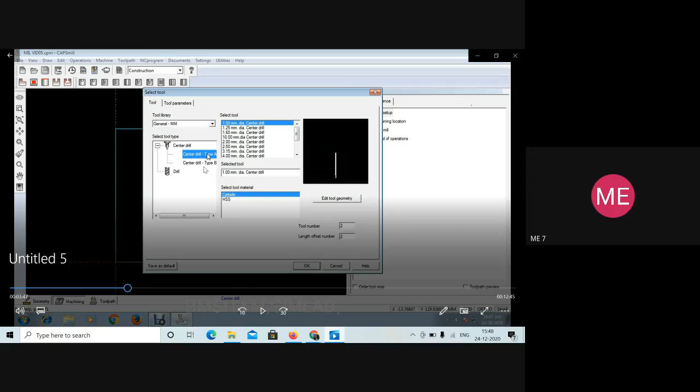So this is the thing, center drilling. First you have to do the center drilling. We have three versions here. First you have to locate the center for doing the drilling. So first you go with the first one, your symbol, which is the center drill. So here select which type of center drill you want. So this is a central drill, right?

Of what is the diameter you need? Of 4 mm is the tip diameter, and others let it be the same. Don't make any changes, press OK. So you have to select which are the centers through which you want to make the drill. So it will select all the 5 points. So then you save. Okay.

So then you can also provide the depth through which you want to do the hole, central hole. So it is of -5, and tool tip depth is given as 2 mm. Then to return, you will move the tool above the blank for 15 mm. So for Z value, you have given as 5. So now this is done.

So after that you go for next. You want to do the drilling. First you located the center, then you want to do the drilling. So you have to select a new tool for the drill. Select the unit as mm, then go for drill. Select twist drill, and in that select the diameter which has been needed.

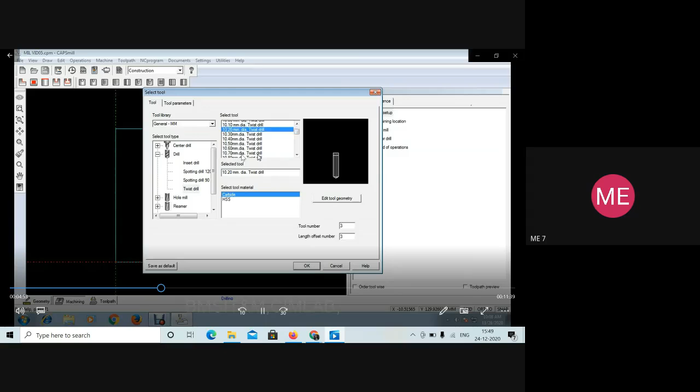So kindly check which are the ranges of diameter which is needed. So here 10.20 has been taken. So select all the points where the drilling has to be done. So you'll click, and the color gets changed.

Then you provide the work surface depth, how much you need, again -5 mm, and hole depth what you want to do. So you have to provide the depth of the hole you want to get. Kindly check the problem, it is of 40 mm exactly. Here you are giving the hole depth as 30. First we located the center for 5 mm, then you are drilling it for a hole depth of 30, so total 35. Then you will use counter boring for finishing with 5 mm more, so total you will be having 40 mm. So as per that you have to check the values and give it accordingly.

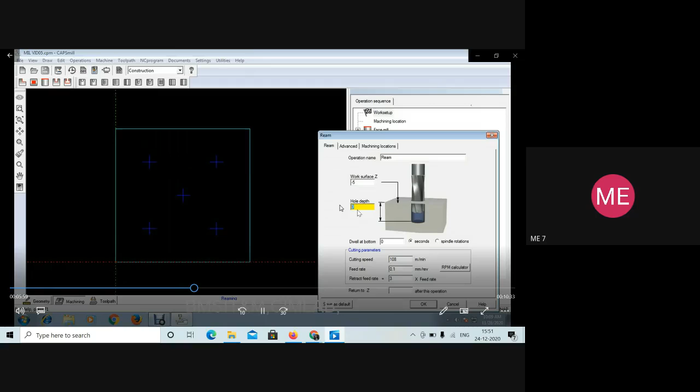So return value for tool will be 15 mm. So that is done. Then you have to use the last tool, the reaming tool. Select all the tools and press OK. And now again provide 5 mm, the last finishing one. The hole depth you will be reaching of 40 mm finally. So the return value for Z will be 15 or 20, you can give.

So that shows that you have defined the tool for face milling, and then you will locate the center, and then you will drill the hole and finally do the reaming. So total we have 4 tools what you have defined and done with the specifications.

So once the machining location has been done, then we go for the tool path. Before that, select the machine as Fanuc. So then go for the tool path. It shows you the blank. Then go for simulate. So first it does the facing operation. It removes a material of 5 mm. So facing has been done.

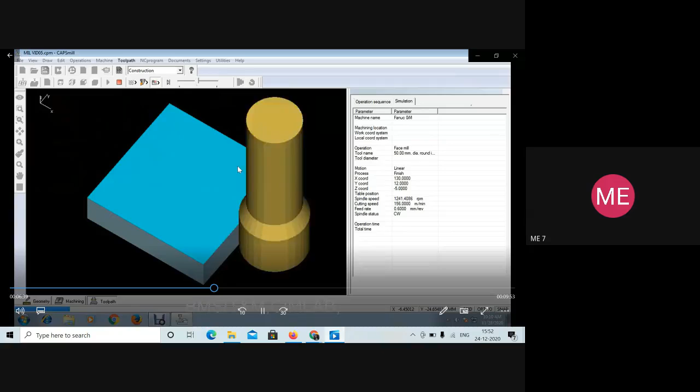So after this, the holes will be located by center drill. It locates the holes at the center and other locations where the drilling has to be done. So all the 5 locations are located, and then you will use the twist drill and perform the hole which will be drilled for a depth of 30 mm. So the drilling has been done over here now.

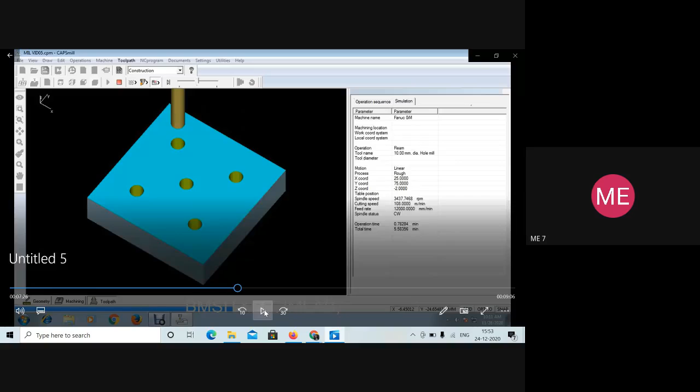Then you use a reaming tool for deep drilling. So you will get a 40 mm hole which has been drilled out now. Normal twist drill will not help you to go for deep drilling. So if you want to go for deep drilling, then you have to go for reaming tool. In that you will get the required depth of the hole which needs to be drilled out. So this is how you perform the operation for drilling apart from end milling and facing. And the importance of reaming tool has been studied here.

So if you go for line diagram, it shows you the path how the tool moves for the facing operation, and remove the material of 5 mm. So until it is removed, it will trace out the path, on the path what you have selected.

So once the 5 or 10 mm has been removed, the tool goes to the home position, the tool will be changed and you will use the center drill to locate the holes. Then the center drill will come and it will locate the holes and remove the material for 5 mm in all the locations what we have identified, point holes. So then again this tool will go and the twist drill will be used and it will do the drilling for a depth of 30 mm.

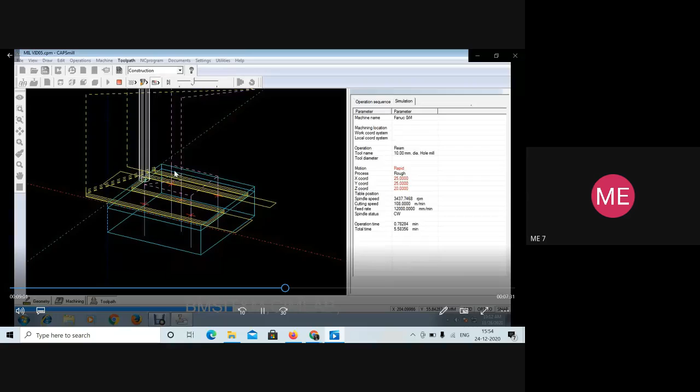So after that you use a reaming tool which helps for a huge removal of the material for a higher depth drilled hole. So for 40 mm exactly, now you have the drilling done at all the 5 locations.

So this is almost done. With respect to different views, you can change and see the location of the tool, how it has been traversed. The same thing you can see in different locations. I'm just forwarding it, the same process in different direction it's been shown.

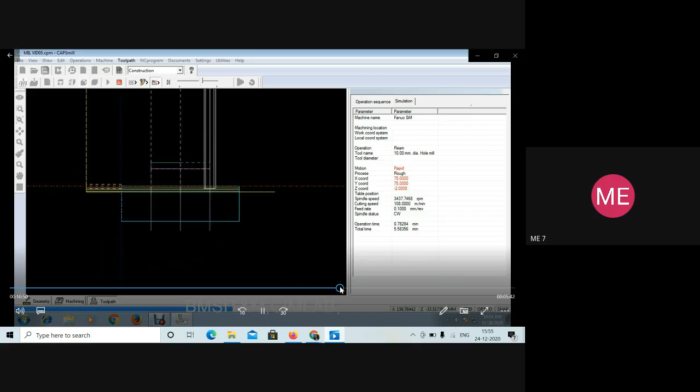So now we need to generate the datas which are being performed. So if you click on the symbol, you will get the first time cycle data. This is shown again, a repetition, I'll just forward it.

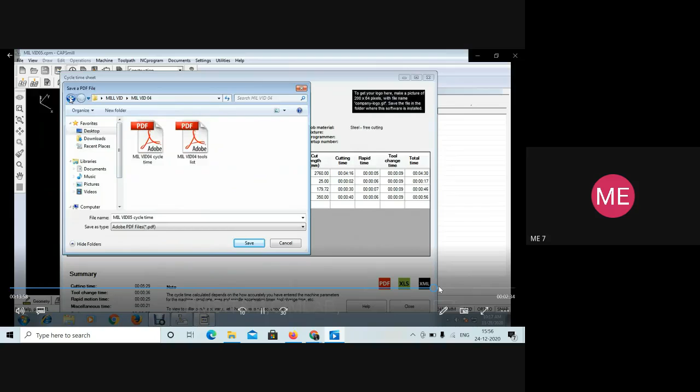Okay, the cycle time what we get will be saved. This is the cycle time data, what we get, you will save it.

The program generation, if you click on G01, the program will be generated, and this is for cycle timesheet. So save this as per your name, what you want to give for different programs under your folder. Then you can generate the program, part program. Then generate G01. It gives you the program generated.

Okay, so you can see now the program, so that also you will save it to your folder. You can give the same program name for the recording of the part what we have done now. So it will be saved as program number 5.

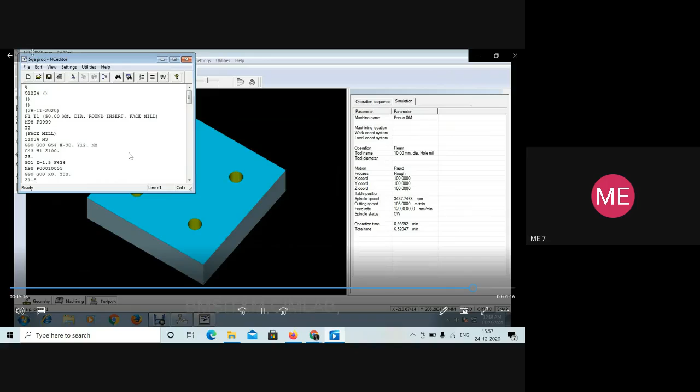So it is saved, which will help you take the printouts. Then if you go for tool, it will show you the number of tools we used. This is nothing but the tool list for this particular part generation.

So save this also. Then if you go for spindle power, you'll get the spindle power graph. Double click on it and you will get the other data as needed. This is the line diagram again, which has been repeated.

So this will end up with program number 5. Now we have done one program of CapsTurn and 2 programs of CapsMill. So it was the 6th program of CapsTurn and the 4th and 5th program of CapsMill.